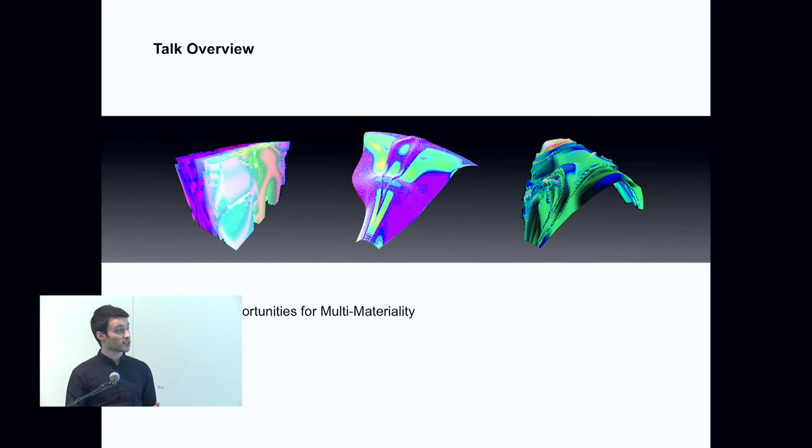So I'm going to talk about some of our work with volumetric modeling. We have some new ways of manipulating material and geometry within voxel-based systems. First of all, I want to highlight 3 of the big opportunities that we see for multi-materiality in general. I'm then going to talk about this big challenge that we see in computation, which is about the representation, the boundary representation with the voxels. Then I'm going to present our approach, where we're using evolvable volumetric gradient patterns. So this is really moving from raster-based graphics to vector-based graphics. And finally, I'm going to demo some of the work that we've been doing.

Okay, so firstly, one of the big opportunities we think is high performance. Nature just builds these incredible material structures. It somehow manages to take weak materials and combine them in ways that make them strong, and this is done by manipulating the microstructures. So maybe we can start to do this. Maybe we can take weak recyclable materials that we have lots of, and combine them in ways that make them strong, high-performance structures. You can imagine next-generation form finding, earthquake-resistant buildings in the future, light skyscrapers, perhaps.

But there are other opportunities as well, and this is about combining different materials together to create active behaviors. I'm sure you've seen things like Skylar Tibbits' 4D printing, self-assembling materials, and morphable structures as well. There's lots of work in aerospace about structures which can bend, exotic compliant mechanisms, and perhaps even in the future, integrating living materials.

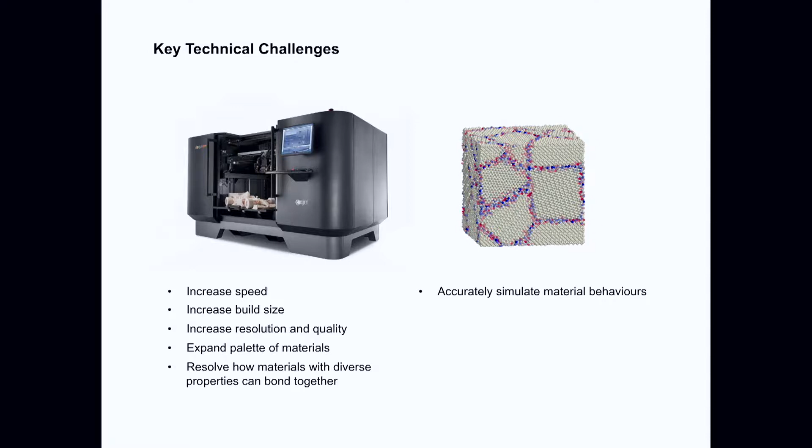In terms of the simulation side, we have big issues in how we accurately simulate these materials and these behaviors, especially when it's multiple materials together. And again, we need to be able to do this in times that are not excessively long.

But we also think there's major design problems. If these are the sort of technical problems which there's engineers working on, there are serious design problems, and these are our problems. These are the ones we've actually got to address. And so the first one is about moving from sort of boundary representations to voxel-based models. And it's really about material integration,

as discussed before. But we think there's a second problem, and this is perhaps less discussed and maybe less understood, but it becomes increasingly important as we start to move towards multi-materiality. And that's this idea of scalability. How do we actually start to control some of these structures? They're really, really complex objects.

So, for example, imagine we'd start to look at these sort of Heinz Isler type structures, these shell structures, and we wanted to be able to create the next generation of these with multi-material properties. Perhaps we could consider how we could change the geometry, but also change the material all the way through. The problem here is that these structures just have so much information, and they have so many degrees of freedom, and they have so many different possible combinations.

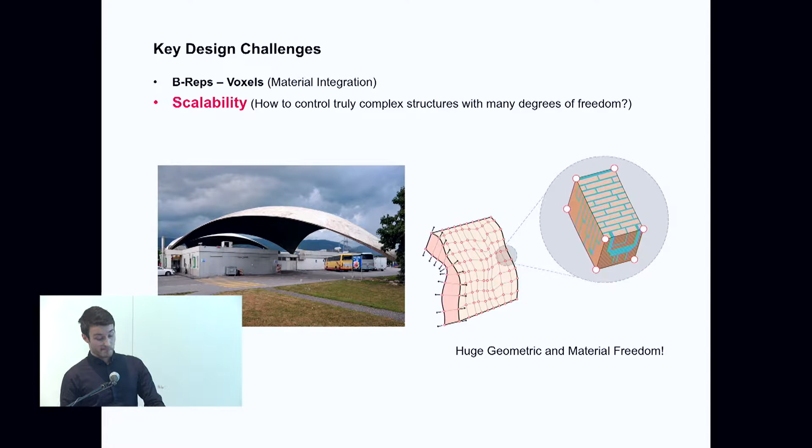Okay, so one of the big problems that we see is how do we actually start to discover good combinations of materials in this space? But before that, it's really, how do we actually even encode this type of structure?

Okay, so the most obvious way we could do this is we could look at direct encoding. So here we would have a sort of variable parameter which would stick onto every one of these voxels or pixels, and that sort of works quite well if you have a small amount of voxels, or if you're working on a reasonably simple or well-understood design problem like topology optimization, where we have good mathematical treatments.

However, if you want to do something more elaborate, like some of the stuff that Kostas was talking about at the start, or perhaps even like that shell structure, having these really high-performance structures, then we need different ways, different algorithms for searching the space. Now, evolutionary algorithms are quite good at this, and they're a good option. However, you start to incur this type of problem.

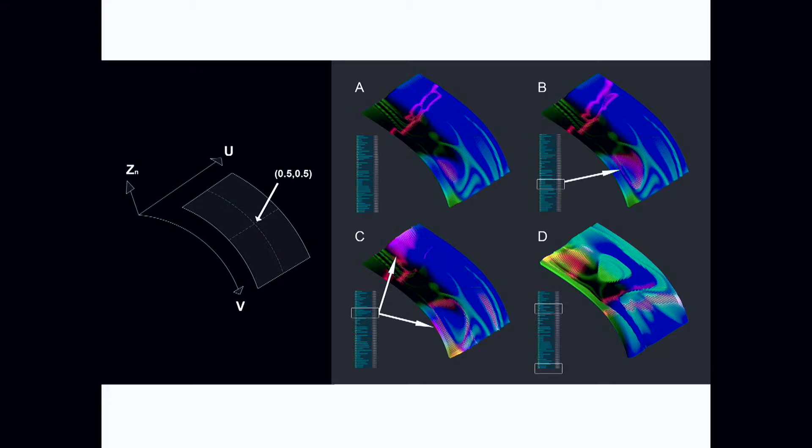And so moving on to the work that we've been doing at the moment. So what we can do is we can actually replace the X and the Y coordinate system and use NURBS space geometry. So we can take a surface in Rhino, bring it in and key on the UV coordinate system, and we can create patterns along surfaces. So this is quite nice, and as you can see on the side, some parameters make big changes, and some parameter changes make very small changes. And this makes them good for evolution, which we can actually optimize these quite well. And we've shown this through a few other studies. So it's a bit like playing with a sort of automatically generated Grasshopper definition, I guess.

Okay, but we can also use these to manipulate the surface, not just add color. We can take all of the points and we can query them and we can extrude them along their normal, for example. And then because we have this evolutionary algorithm which underpins it all, we can start to evolve surfaces that have good structure. So we can use sort of simple FEA software, and we can assign boundary conditions, assign loads, and we can optimize for specific mechanical properties of these surfaces. And obviously we can fabricate these quite easily.

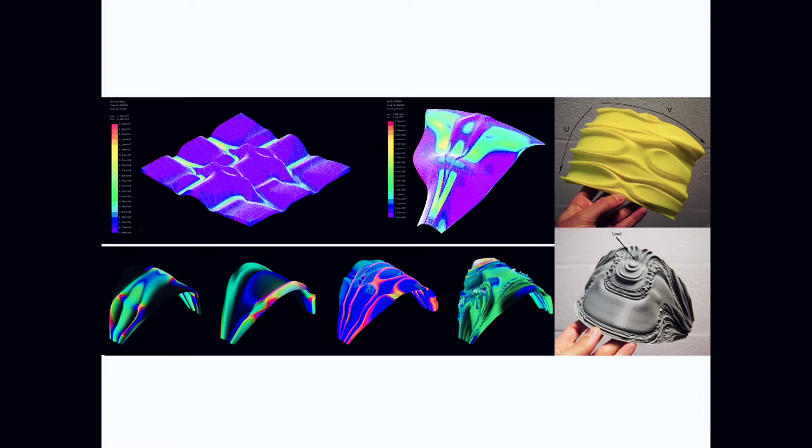Okay, so now it starts to get really exciting when we start to introduce multimateriality, because these things also work in 3D. So for example, if we use the U and the V coordinates of these NURBS surfaces, but we also have a sort of a Z coordinate which is relative to the normal of the surface, if that makes sense, then we can start to create shell structures which have a thickness, and we can manipulate all of the sort of voxels within that volume.

So what you can see here is simple XYZ geometries where we've used our CPPNs to create sort of random patterns to show really. And so as this CPPN shows, we have an output which says, are we going to place a voxel there or not? And if we are going to place a voxel, what's the material property of that going to be? And so this work is sort of still in process, but we're hoping to be able to create some nice multi-material structures in the near future and be able to optimize these for certain mechanical properties.

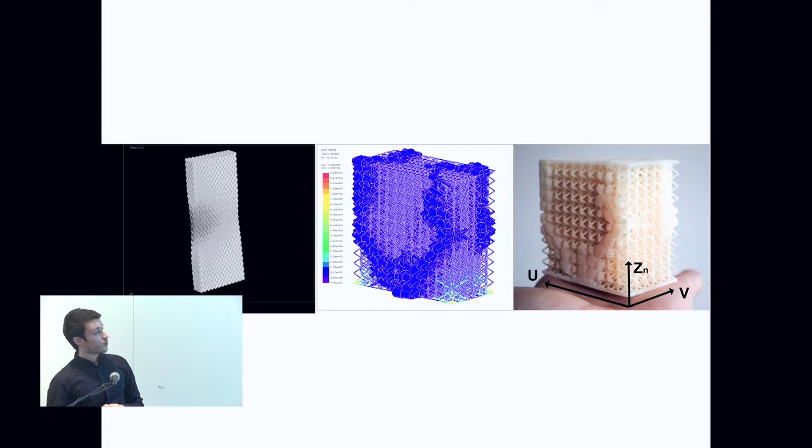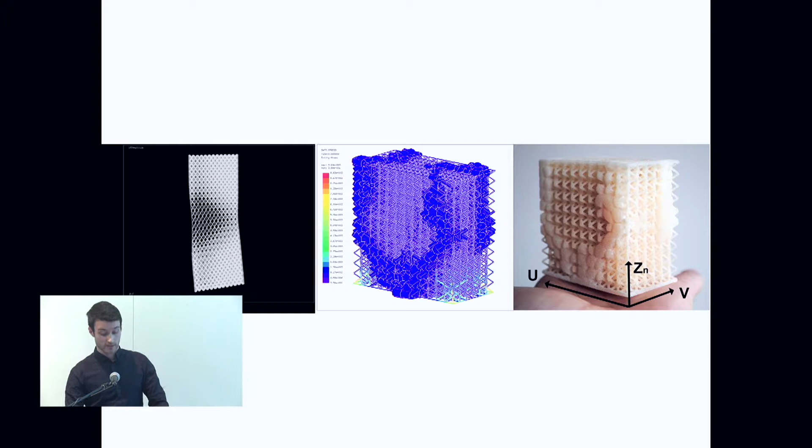And so as you can see by this dynamic image, this GIF, we don't necessarily have to optimize just for static behavior anymore. We could actually start to create compliant mechanisms, morphable structures, and there's lots of exciting opportunities when it gets to this stage. Again, this work's still in progress, and so we'll be working on this.

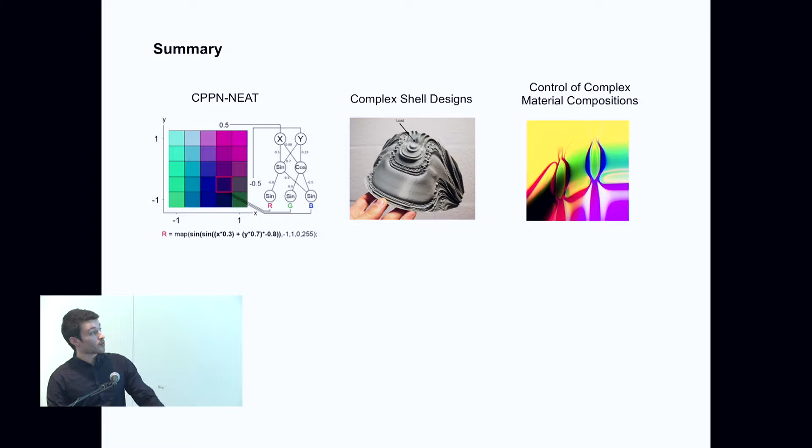So, in summary, we've created this nice, scalable encoding for multi-material design. Or we haven't created it, we've been developing it. The actual algorithm was developed by Ken Stanley. We've been able to present some nice complex shell designs, and there's lots of opportunities here. And we can control material compositions in ways that we couldn't beforehand. But there's some nice properties to this.

First of all, we have this very powerful algorithm under the hood, which is NEAT, so we can optimize these. Evolutionary algorithms are really well suited for distributed computation, so we can actually throw these things up onto the cloud potentially, and we can evolve really complex things. And this is where I think it starts to become exciting as well, that we can start to fabricate structures which are too complex to actually simulate on the computer.

So as Francis talked about before, there's this important process where we take our three-dimensional models and we slice them up. So if you see this two-dimensional image on the far right, we can actually create our slices from the CPPN information. So we can query each slice, which means that we can massively extend this to the biggest resolution that we can actually handle. And we can create all of those slices, and the final object could be much more complex than we could actually simulate on the computer. So this is interesting as well.

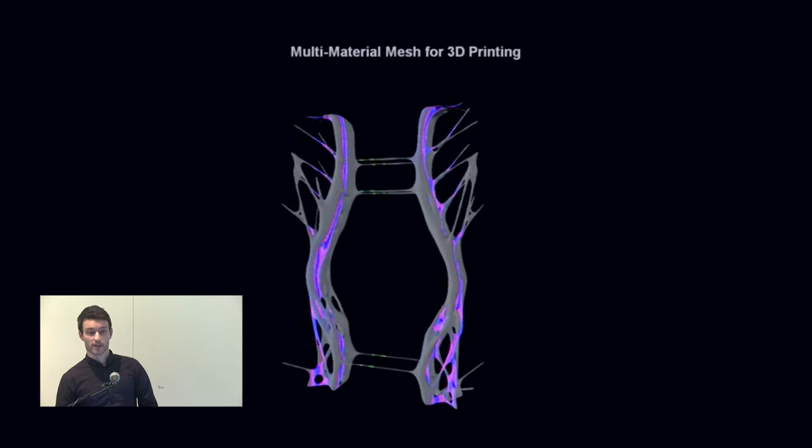And so finally, the thing to point out is that we're not limited to NURBS space geometry. We can do this in three-dimensional space. So we can start to play with these things more speculatively in three-dimensional space. There's lots of opportunities for generative design. Again, we maintain all of these properties that I've talked about, scalability, the regularities, and the infinite resolution. And we can start to play with these things with physics systems and all sorts of things.

So I guess the takeaway point is that once we start to move towards multi-material design, we start to create objects which are truly complex. And therefore, we need representations which can handle this. And CPPNs are a good option here. And so the tools and techniques that we've presented seem to be one good route towards being able to create multi-material design as we move forward. And that is the end.

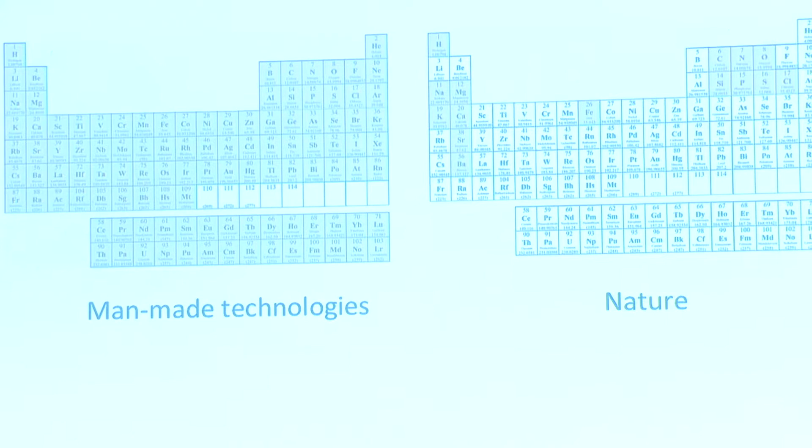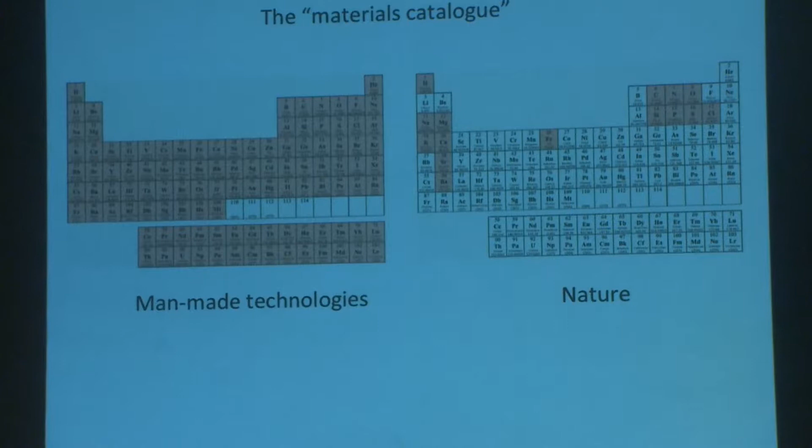So I'm going to start with a slide that addresses the very interesting point made this morning about the idea of having a catalog of materials from which architects could draw properties and information in order to fill in an algorithm or a software that would help them design materials. The reason why I start with this is to make the point that actually, if you do that, and if you think about all possible sources of materials available that are processed through man-made technologies, you can basically have the whole periodic table, which is very good, of course.

But it's also interesting to see how this is done in nature by living organisms. And if you look at the materials in terms of chemical elements that they use, this is a lot more restricted in terms of chemistry. And why is that interesting? That's really interesting when you think about energy efficiency, sustainability, biocompatibility, and so on. Why?

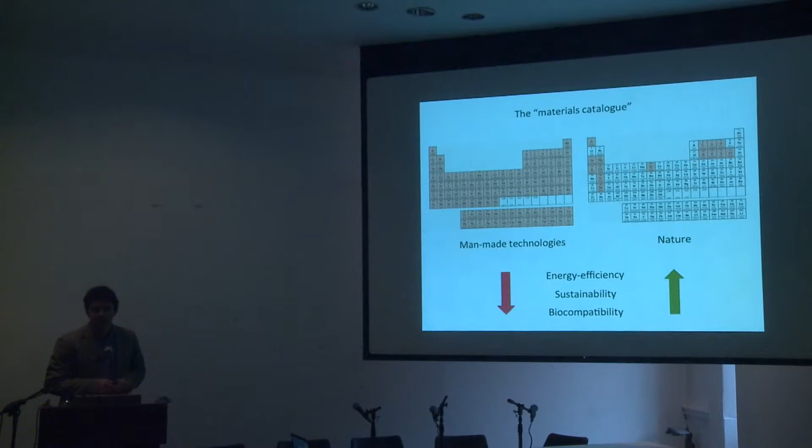Because nature had to live with this very narrow selection of chemicals in order to be energetically efficient, sustainable, biocompatible, and so on. So how does nature do that? It actually does that by taking this narrow selection of chemical building blocks and then arranging them in a very special way, as we heard already in the previous talk. And this leads to really interesting structures.

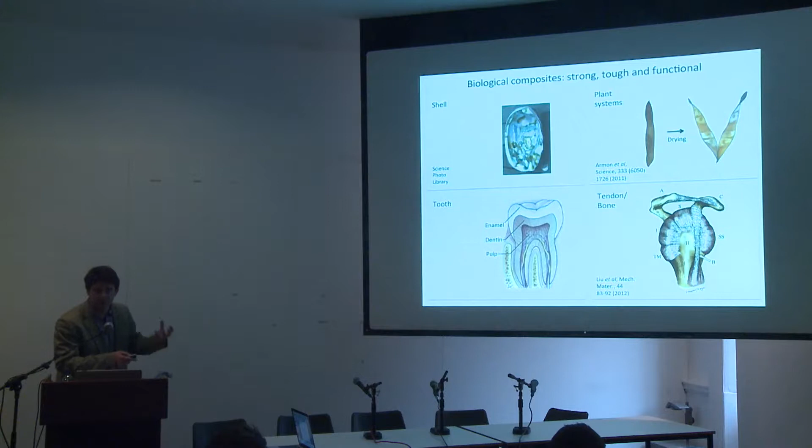We already heard about the seashells, the inner part of which is nacre. We also have amazing examples of microstructured composites like the tooth, the tendon to bone connection, which would be a region of very high stress concentrations, and yet it's very resistant to fatigue.

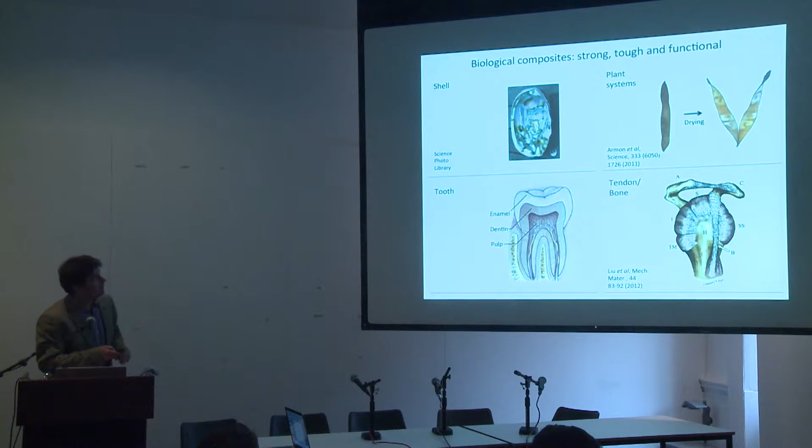But it's not only about mechanical properties, but there are also very interesting kinds of shape changes that are possible by microstructuring these materials. And here it's important to note that this shape change happens in the absence of any cellular control. So this is dead material, yet it's able to change in this dynamic fashion. So what's really unique about these materials is that they really have amazing microstructures, and that's what enables them to make something weak into something very strong or functional.

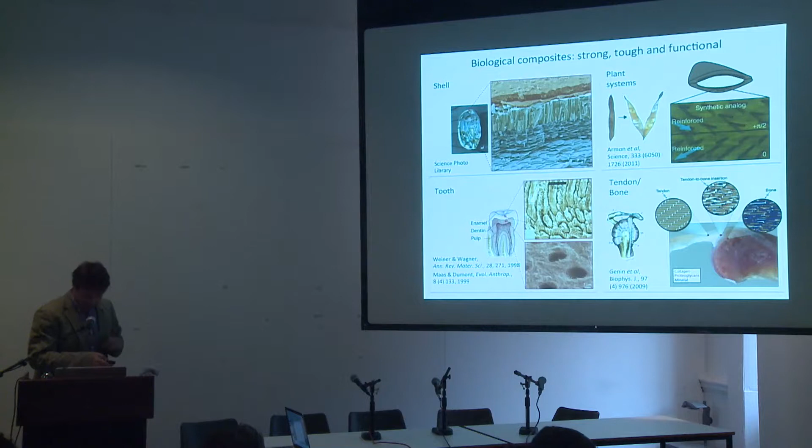So actually, if you look at the seed pod, in each one of these halves of the seed pod, you see a bilayer with cellulose fibrils oriented in a very particular way to generate this shape change. And here's another example where you have a combination of a gradient and orientational control as you go from the soft tendon to hard bone.

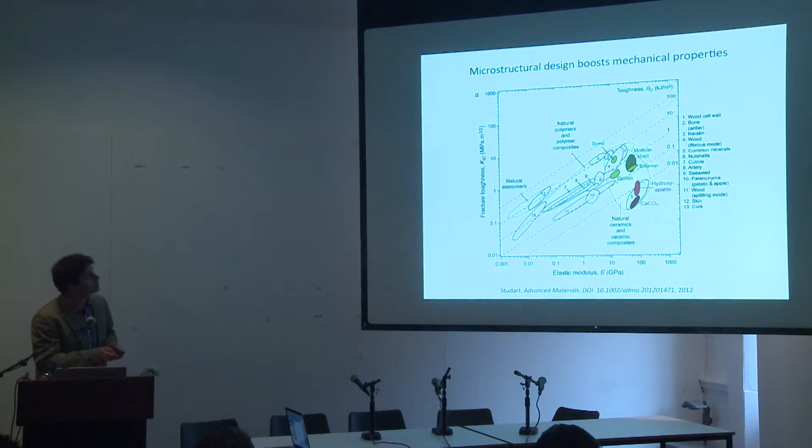Okay, so one other important aspect is that it's not always that we want to mimic one-to-one what's available in nature. First, because we can, in some applications, actually benefit from the wider range of chemicals that we have in man-made technologies. On the other hand, the boundary conditions in nature might be very different from engineering. So what we would really like to copy from nature is not the structure itself, but the design concept or the physical or mechanical principles behind these structures.

However, it's important also to remember that all these beautiful microstructures are all made via cell-mediated processes. So you need living organisms to make all this. So the big question in our field is how can one actually make this synthetically? So how can one make this using not the slow processes that nature uses, nor the complicated cell machinery, but in a more engineering approach.

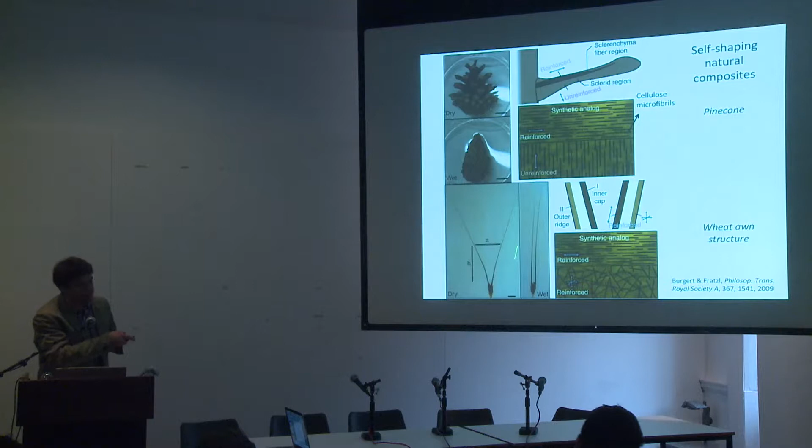The exact same idea, though in a slightly different configuration, is seen in these little hairs of the wheat awn structure. And here we have, again, this bilayer on one of these valves. Again here we have the fibers orthogonal to one another, but this time you have them tilted by 45 degrees with respect to the long axis of the system. And therefore you don't have pure bending, but you rather confuse the system and lead to this twisting as the minimum energy configuration.

So what I'm going to show you today is basically how we can, in an engineering approach, try to replicate this design concept. So I divided the talk in 2 parts. First, I'll tell you about a technology we've developed to align anisotropic particles in a fluid and then afterwards consolidate this fluid so that we keep this alignment. And second, how we can use this to achieve these self-shaping properties.

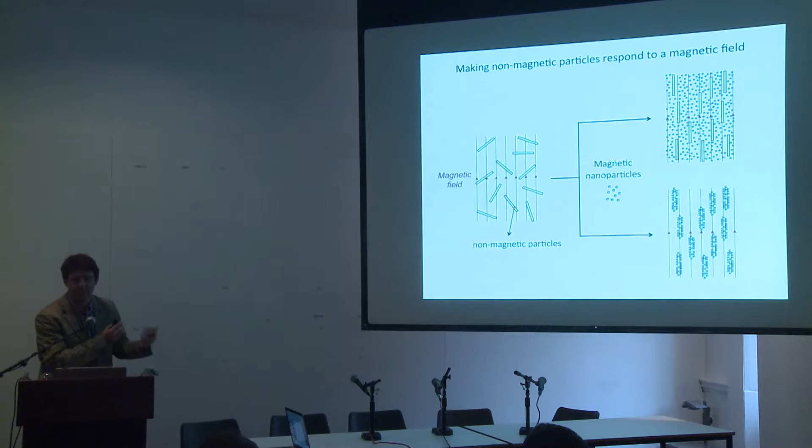One problem is that it's not always that you will have reinforcing particles which are magnetic. The metallic washers are magnetic themselves. So in that case, you have to come up with a trick to make non-magnetic fibers or platelets responsive to a magnetic field. There are two means to do this. One is by adding magnetic nanoparticles into the fluid. So imagine now these particles are suspended in the fluid, and now you add to this continuous phase the magnetic particles, or you adsorb these magnetic particles on the surface of your fibers. And in both cases, what you're doing is creating a mismatch in magnetic properties between the dispersed phase and the continuous phase.

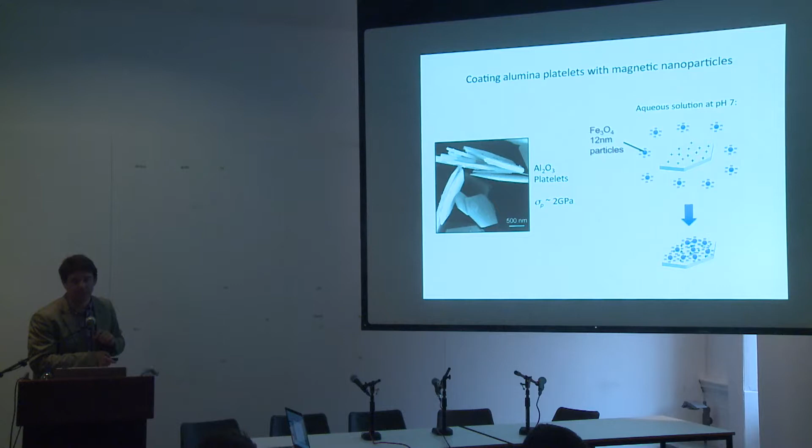So this is how we do it in practice. This is one of the types of reinforcements we use. These are ceramic, very stiff platelets of aluminum oxide, about 10 micrometers in the long axis and 300 nanometers in thickness. And now we coat them with iron oxide nanoparticles, so basically rust nanoparticles. So now I'm going to do the same experiment I did at the macroscopic level, but now under a microscope, looking at each one of these tiny microplatelets with the iron oxide coating.

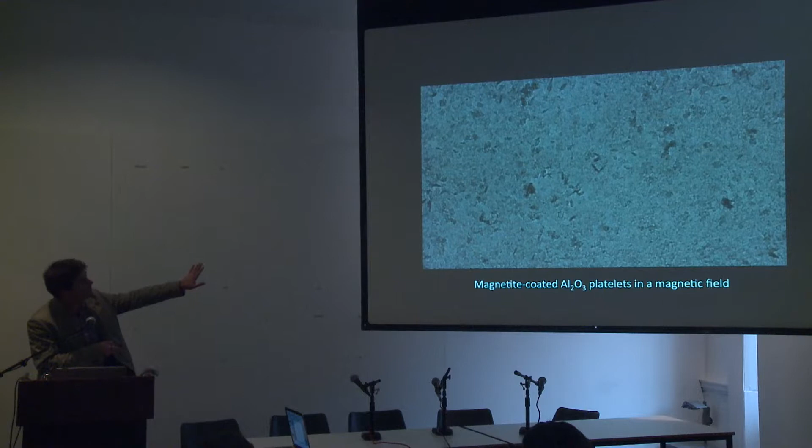So first, they're relatively heavy. They're 10 microns, and aluminum oxide is quite dense. So they all sit in a horizontal fashion on the glass slide, but now I'm going to apply a magnetic field out of the screen again. And you'll see that as soon as the field is on, they jump out of the glass slide, very nicely responsive. And if we turn off the field, you'll see that they all get back because of gravity. So this works very nicely.

But what was really a surprise to us was how low were the magnetic fields needed for such an effect. So we typically use tens of millitesla. So just to give you a feeling for it, this is the kind of magnetic field you get from the magnetic stripe of your credit card. Very, very low fields. And we went on to study this, and we realized that we're actually in a sweet spot in terms of particle size.

So now we have the ability to align particles in a fluid. All we have to do to get a composite is to transform this fluid. So imagine now a polymer melt or a monomer that you polymerize, to transform this fluid in a solid. So here's an example of one of our first approaches to do that. If we turn the magnetic field on out of the plane and then we consolidate the fluid, you see that we can nicely have the orientation that we got through the magnetic field. So in this case, an out-of-plane orientation as opposed to a horizontal orientation if the field is off.

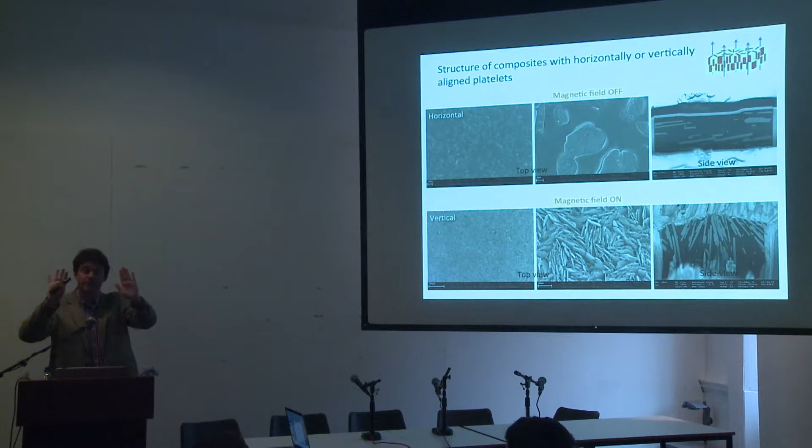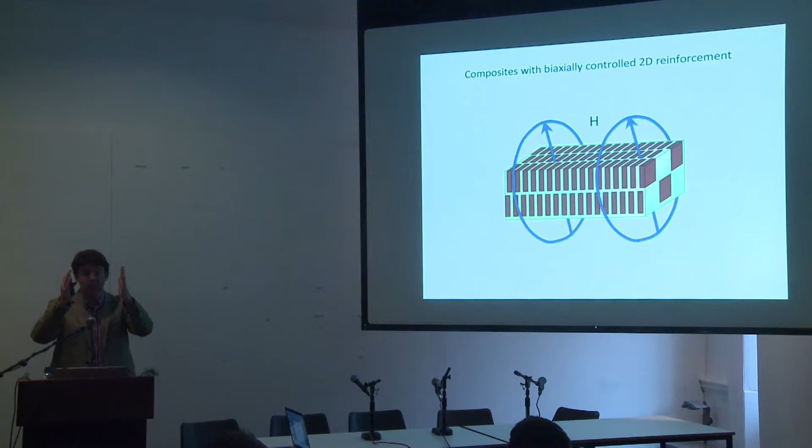So one problem if you work with platelets is that you see them all sticking out, but if you use a static magnetic field like this, you don't get control over the second axis of orientation, and that limits the maximum concentration of platelets you can get. So to solve this problem, you can actually rotate the magnetic fields to force them to align into the plane of the rotating field. And here are some of the ways. These are all proof of concept experiments at very small scales, but in principle, there's nothing that hinders this from being applied in bigger structures. So we can do this on a little larger samples to measure the mechanical properties. We can do this under a microscope to study this alignment effect.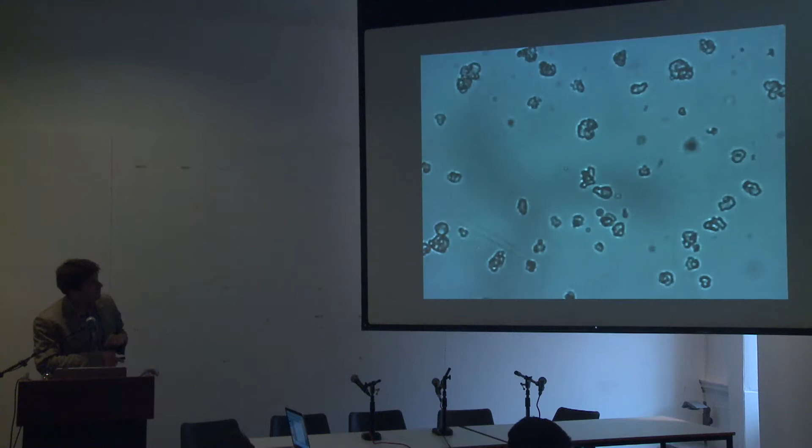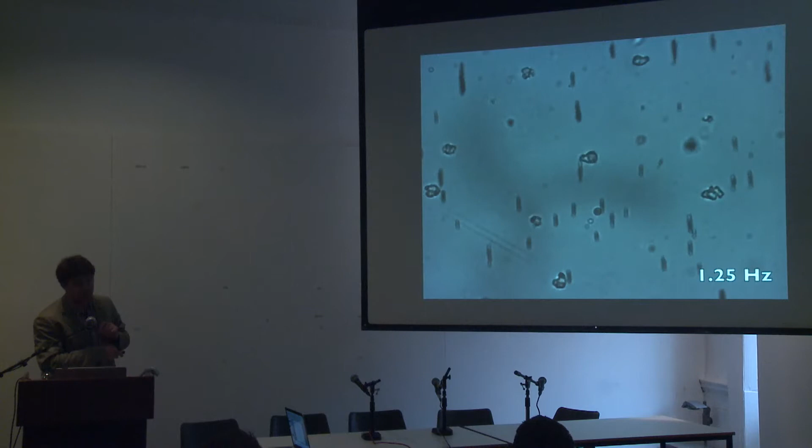Here's an example, again, of the little microplatelets, and now I'll apply a magnetic field in this direction, and you'll see that some of them align right away, and some start rolling, and then I'll start increasing the speed of this rotating magnetic field, and you'll see that at a critical frequency, critical speed, all of them will align in this biaxial fashion, which allows us to really control in 2 dimensions the orientation of these platelets.

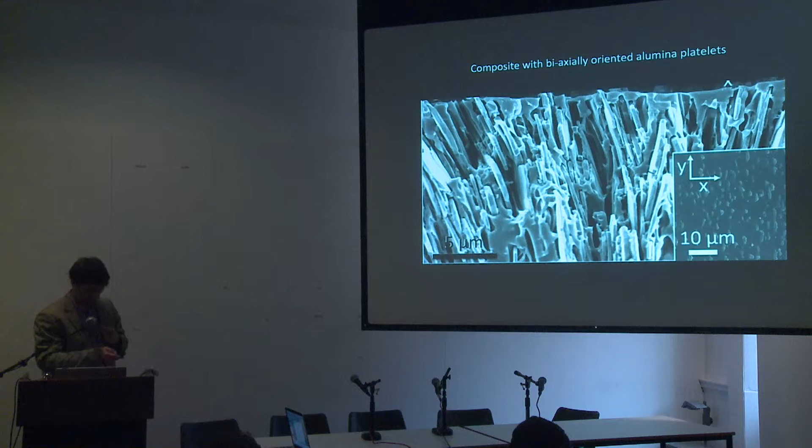So you can model all these and come up with an expression that tells you what is this velocity of the rotating field in order to achieve this alignment. So I won't go into the details here, but that's a very important quantification needed for the actual realization of the alignment. And here's an example of an unusual orientation, which is an out-of-plane orientation that you would not get by, for example, just applying shear to the system, that we are able to achieve using this technology. And you can imagine many other possibilities using the rotating field, static field, field gradients, combinations of responsive with non-responsive platelets, and so on. And here are some real microstructures that we've been able to realize using this approach.

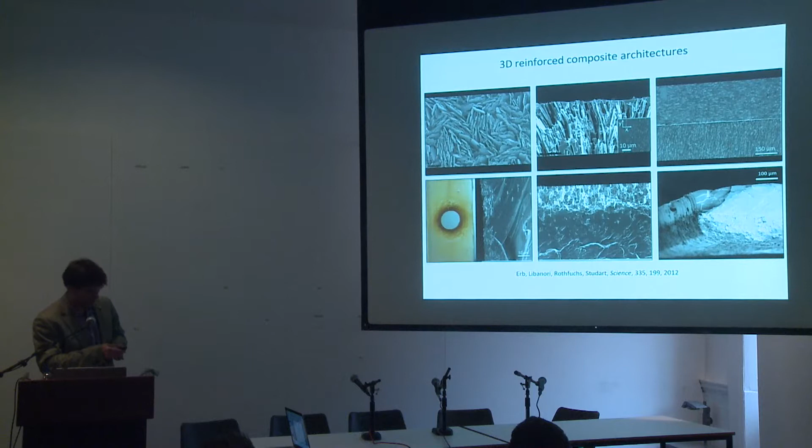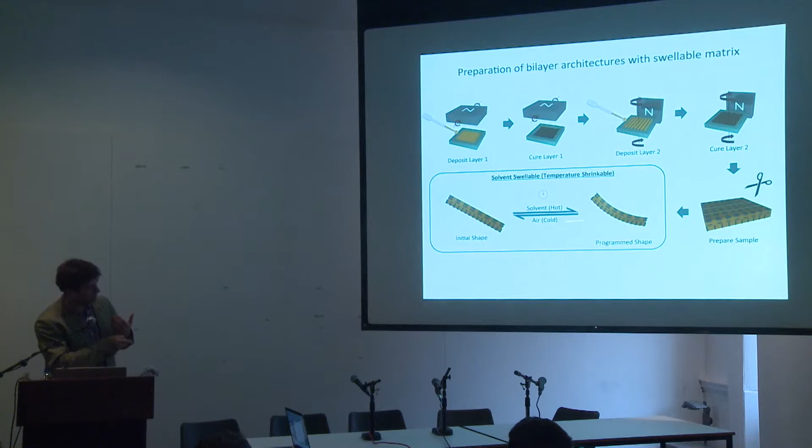So now the question is, can we exploit it to make self-shaping composites? So here, I've told you already that the design concept behind this self-shaping effect is to align platelets or fibers in a given direction. And since we know how to do that, all we have to do here is basically to use this approach in bilayers. So here would be a first layer of your material, here would be a second layer, and in each one of the layers you have an orthogonal orientation of these platelets. And now if we just cut it and have a polymer matrix which is responsive to an external stimulus, we should be able to see these effects. And indeed, that's what we see if we take a bilayer and we cut it at what we call a zero cutting angle, because it forms a 0-degree angle with the bottom layer.

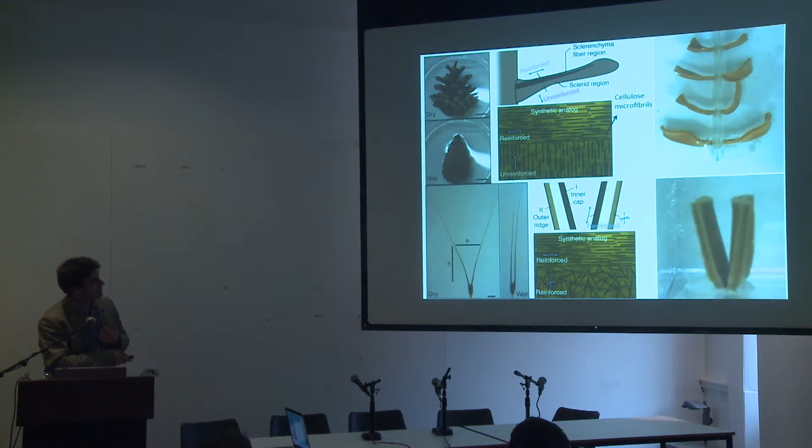If you do that and put it in water, you see that it nicely replicates this bending effect. However, this is rather easy to do with metallic bilayers. What is more interesting is actually this twisting effect. And here, for us, it would be very easy to achieve because you can take the same bilayer but now cut at a 45-degree angle in order to reproduce this design. And if you do that and put them in water, you see that they nicely reproduce the shape change that we program through the fiber architecture.

And you can then go all the way from pure bending to pure twisting with mixes of the two, and change the chirality depending on the relative angle of the two, and that provides a wider design space for these self-shaping structures.

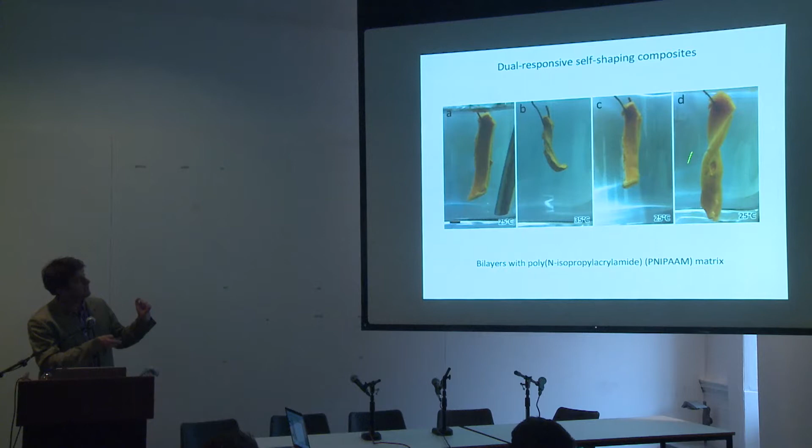The other interesting thing is that we can pick polymer matrices which are responsive to more than one stimulus. For example, this one would be responsive to water uptake and temperature, so that if you first increase the temperature, it twists in one direction, and then if you cool it down again and let it swell, it would twist in the other direction. And you can repeat this as much as 20 times, and it will always do it reproducibly.

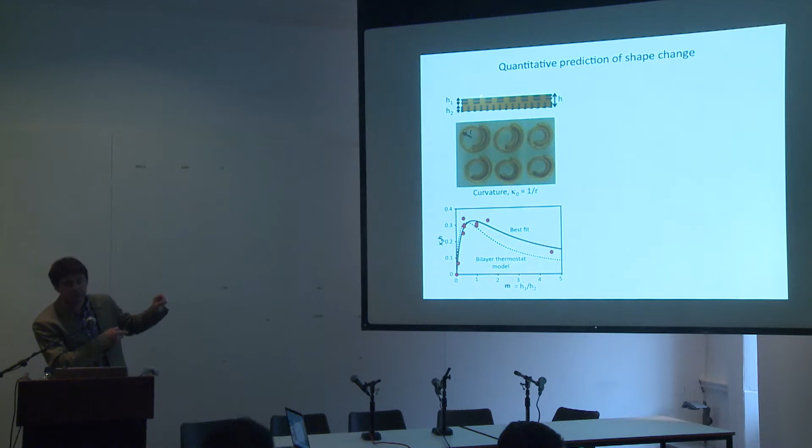Of course, now if we talk about programming the shape change, you also have to connect initial parameters of your structure, like the relative thickness of these layers, or the cutting angle, with the final structure or geometry that you get. In the case of bending structures, this would be the radius of curvature. In the case of mixed shape change, you would have the radius and the pitch. And I won't go into details, but we are able to nicely predict these final geometrical parameters based on initial properties of your composite.

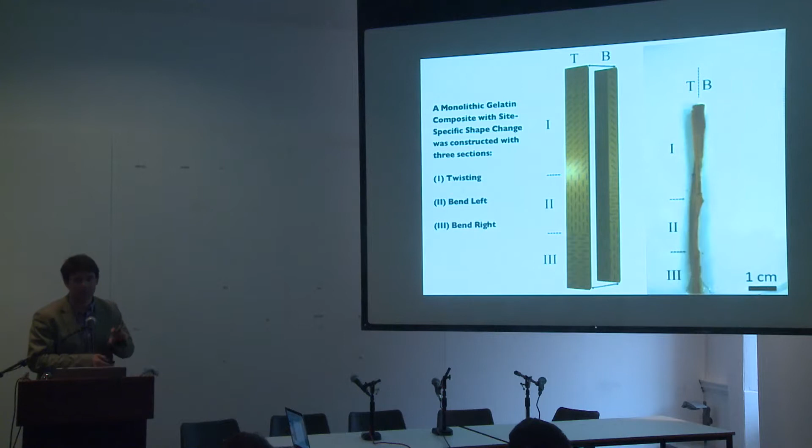The other possibility here is that you can program different regions of the material to undergo different shape change. So here we program this part to twist, this to bend to the left, this to bend to the right. And if you eventually put them in water, you see that they will react as we've programmed.

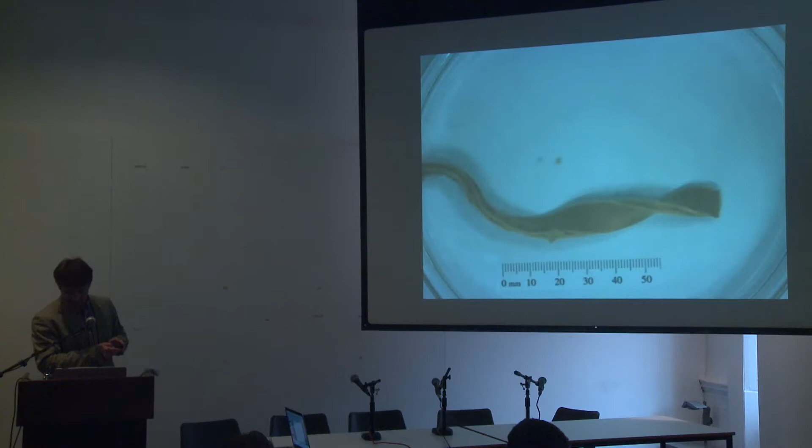So this brings me to the summary. I told you about technology that we've developed where we use magnetic fields in order to control the orientation of reinforcing particles, first in a fluid. And we had this surprising observation that it's extremely easy to align these particles as long as you choose particles with the right size. And then I told you about how one can exploit this to make a wide range of different microstructures that are not possible with today's long fiber composite technologies.

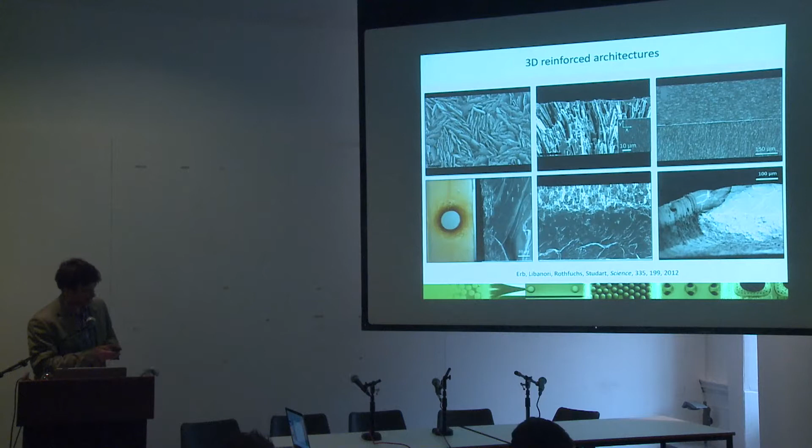And then I gave this example where we've used this ability to align platelets in order to achieve such a self-shaping effect, which can be bending, pure twisting, and combinations of the two. And what's really important here is that, of course, you do have synthetic materials that are also shape-changing, like metallic alloys and other polymers. But again, these are specific to a narrow selection of materials.

If you think of metallic alloys, you have, for example, nickel titanium, which has one specific phase transformation at the atomic level that allows for this shape memory effect. And with polymers, the same thing. You always need polymers with a specific glass transition temperature. And here, you're not limited at all. You can use any type of fiber, which is sustainable, energy efficient, bioresorbable, and so on, and any type of matrix as long as it's responsive to an external stimulus.

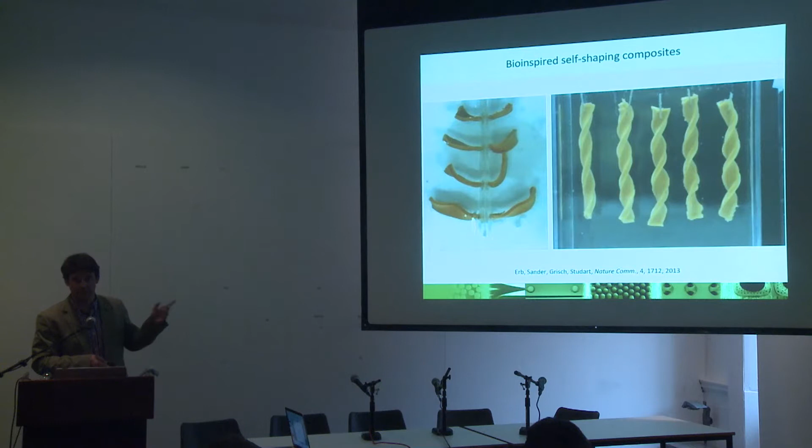So that brings me back to the very first slide, where another possibility in terms of materials design is not only to pick one from the existing catalog, but take those which are interesting from other aspects and microstructure them to get interesting functionalities like this self-shaping one.

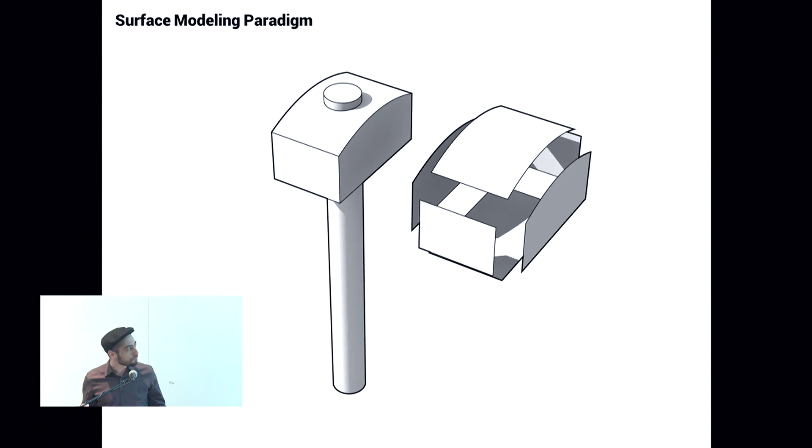Now, you heard again and again today the criticism towards the boundary representation paradigm. All the software tools we have at the moment for design are using more or less the same kind of underlying representation. If I were to ask my students to design a hammer, I would get something like that. Maybe it would look much better, but the conceptualization of the hammer would be that what is important about it is the actual exterior frame, the shape of the hammerhead.

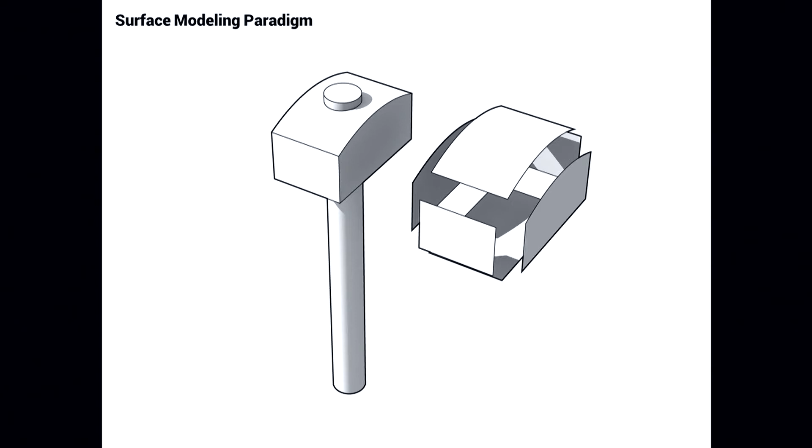But in reality, if a blacksmith creates a hammer, what is important is the distribution of soft and hard iron within the hammerhead that absorbs vibrations so that you don't injure your hand when you use it. So the boundary representation basically assumes that there is a boundary that separates an interior from an exterior. And what happens within the boundary is not part of the thought process, part of the design process. It's very difficult to define and work with.

It also affects the way we think about architecture because it very strongly suggests that architecture is about the design of envelopes or skins that, again, separate an interior from an exterior. I mean, there are ways to go around it, and conceptually, architects have been very innovative and creative in that sense. But in general, the tools we are using do strongly suggest this distinction.

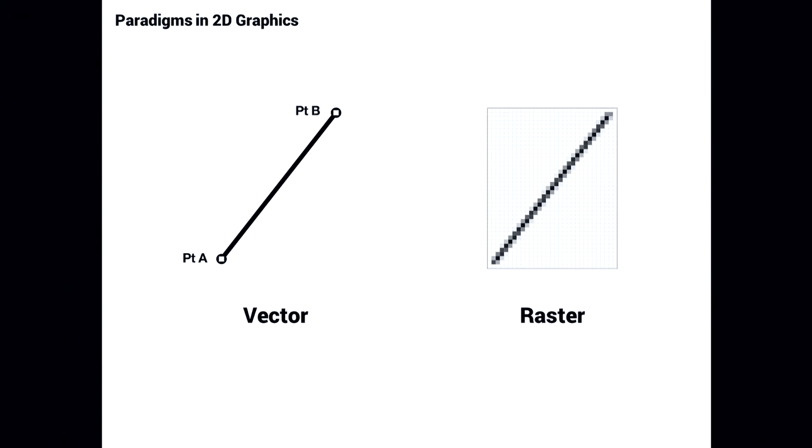At the same time, the software tools that we are using are based on a vector representation when we are talking about CAD and design software, or a raster representation when we talk about image editing software. But if we wanted to create these continuous material distributions, we need a new paradigm. And what we are suggesting is a hybrid between traditional CAD modeling and workflows from image analysis and the biomedical field. Part of my interest comes from my exposure to topology optimization.

When I was working in an engineering firm, we did a lot of research and developed interfaces that implement these sorts of methods. And in the opening chapter of Bendsøe's book on topology optimization, he describes the problem of structure as one of a continuous material distribution, which again is a different paradigm in terms of how we think about structures, even if the forms are familiar.

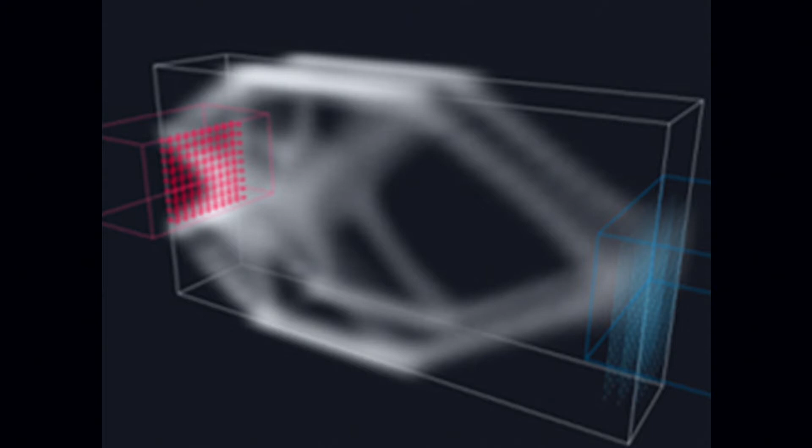For this kind of cantilever, you can find the optimal form in many different ways, and actually we know the optimal conditions and shape even without topology optimization. But the way we reach that conclusion using these methods suggests a different way of thinking about structure and materiality. So it's basically a more fuzzy object.

So, obviously, we're going to talk a little bit about voxels as extensions of 2D pixels. These are very straightforward, you know all these things. Our software is based on a multi-channel voxel image that has two channels, one for designating shape, the distinction between void and solid, but in a continuous field, so you can select different isosurfaces, and at the same time, by using a gradient, you maintain some information about normals that allows a smooth reconstruction of the underlying shapes.

And the secondary channel, which is the material mixing. And this comes from the fact that when we started the research, we were working with Objet, now Stratasys, and their multi-material 3D printer Connex. So the way this achieves the continuum distribution of material is basically a mixing of two materials at variable ratios. So this secondary channel describes the mixing ratio between two materials.

So if the material A is transparent and the material B is opaque, you have an opacity gradient. If one is rubber and the other is plastic, you have a stiffness gradient, and so on. So by combining these two channels, we have objects that define both the shape and the interior distribution of material.

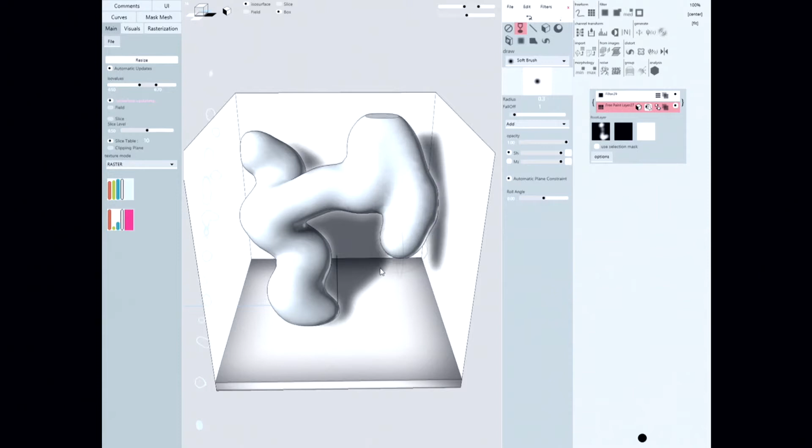So first of all, these are uses of the UI for Monolith. So it's a user interface that allows you to define this kind of volumetric model. So you're working on a voxelized space. You can work with workflows that are familiar from using any kind of image editing software, but you can also apply filters on models like Gaussian blurs and so on that are workflows, again, that come from image editing.

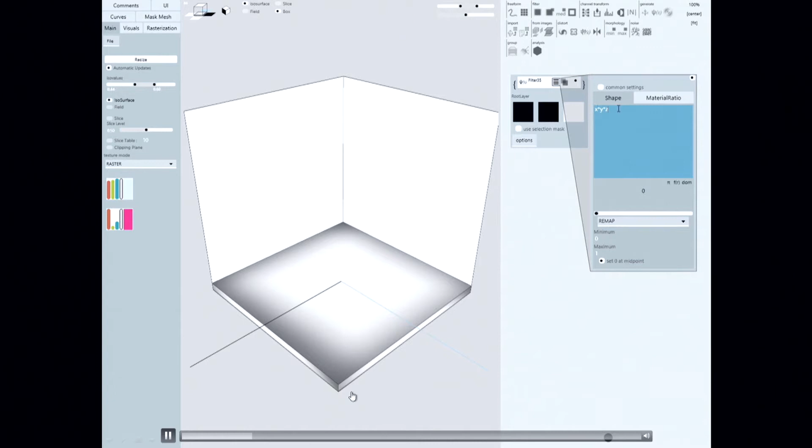You can define formulas, parametric formulas that define the shape and superimpose them. Monolith is based on an idea of a parameterized stack of superimposed voxel images. So here creating one formula generated pattern, and then the gradient, the material mixing field, is another formula generated pattern.

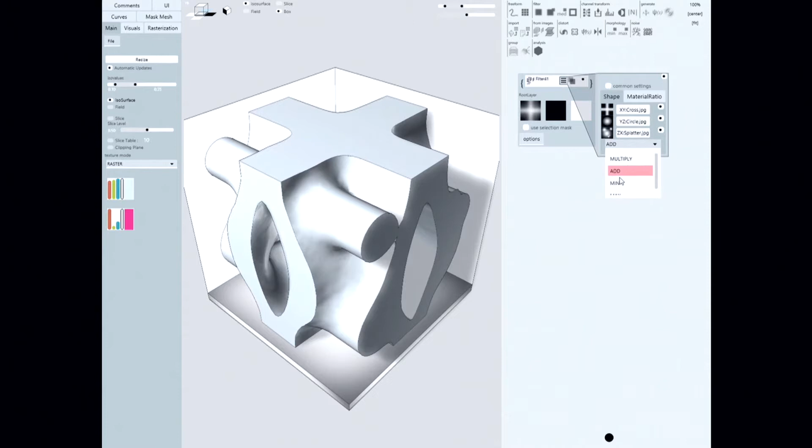Again, operations like sweeping and lofting and all this becomes fuzzy and continuous. So here is lofting between two images that you can draw in any software. And you can achieve types of joints and continuity that are very difficult to do with surface modeling. And that is because voxel-based modeling is more flexible in how it handles topology. So you can have continuous topological variations that are difficult in the BREP regime.

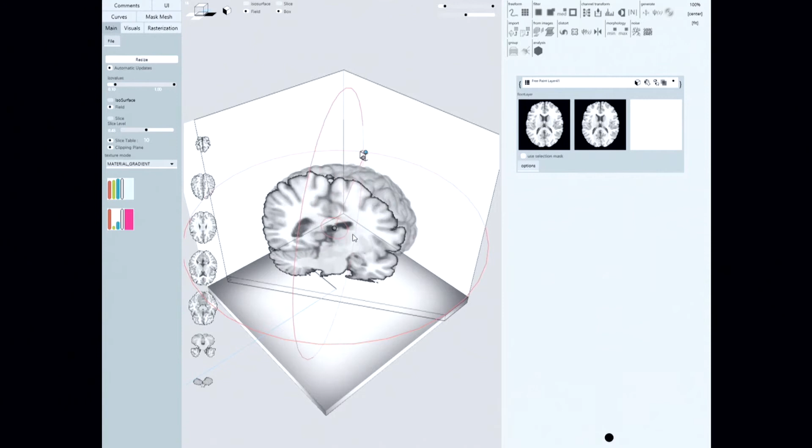You can work and manipulate complex data sets and apply, again, transformations on them. There are visualization tools that allow you to see the inner structure. These are taken from the medical field and so on. You can also bring in information like meshes and voxelize it, like you see the bunny here. The bunny is a reference mesh.

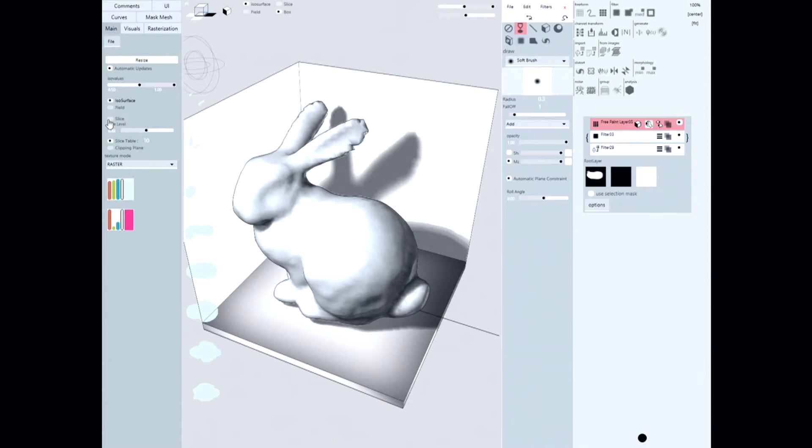The voxelization, again, has to use traditional typographic techniques that create a little bit of anti-aliasing along the boundary so that it maintains information about the gradient and the surface. So you don't get a pixelated bunny. But you can also work on its interior. You can also define that I want this opaque material here and this transparent material there. You can apply filters like Gaussian blurring and so on.

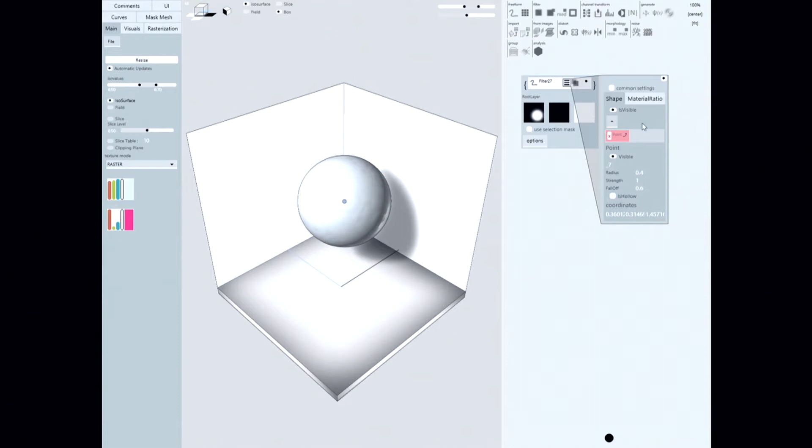Boolean operations become fuzzy again because these are continuous gradient fields. They are not necessarily a black and white condition. And so when you combine gradient operations, you have this typical mixing of additive, subtractive, and so on. But there is a little bit of fuzziness, so it's a natural filleting that comes with this process.

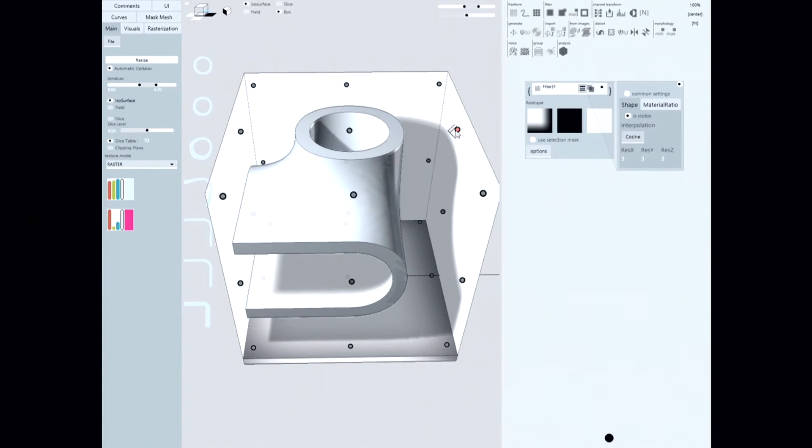And this is another workflow, which is the equivalent of editing the control points of a surface, a grid-based NURBS surface, but you can choose different interpolating schemes, and that changes the underlying shape. So by changing the weights of the control points to positive or negative and the interpolation scheme, you can very easily sculpt this sort of continuous objects.

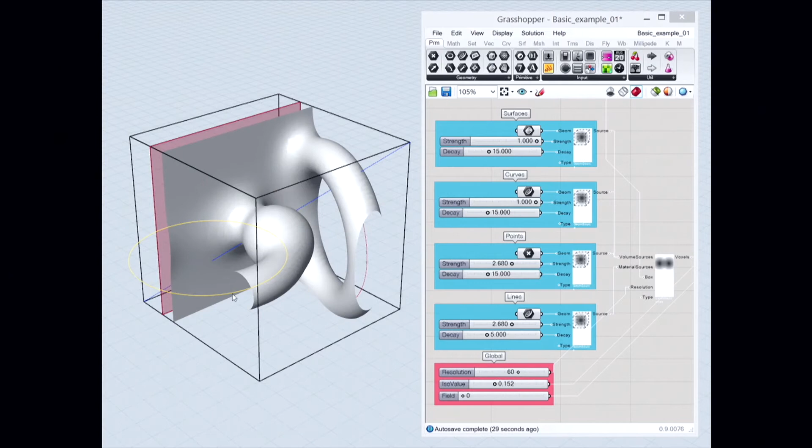We can also do workflows. So we're trying to position it as a hybrid. So we do allow workflows that encompass software that we are already using. So it can have a live connection with Rhino, for example. So you can have the skeleton defining geometry from Rhino or Grasshopper directly imported or emitted towards Monolith. It can even work in real time.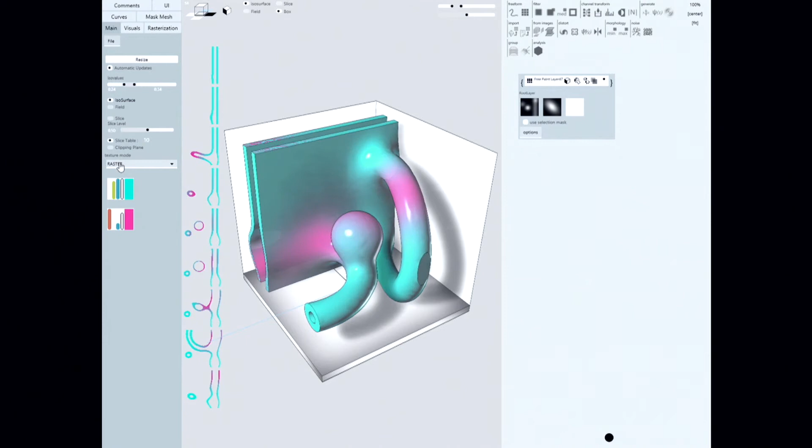And there is a back and forth of translation between skeleton geometry, FREP, boundary representation. So there are workflows that combine all the familiar ways of working. The other important thing when you're working with voxels, though, is that you can apply filtering operations. And filtering is a concept that comes from image analysis. And that's an interesting transition point.

The software we are using now, the BREP software, was not developed for architects. It was developed for mechanical engineers. And the way it uses the assembly paradigm and the modeling system, it presupposes or implies a mechanical engineer's mindset. The voxel-based software is developed and comes from the biomedical industry. And the mindset there is one of filtering, signal analysis.

So geometry is seen as a signal. It's not seen as discrete units, differential manifolds and so on, but it's seen as a signal that you can decompose and rearrange in many different ways. So as I said, you can do Gaussian blur, which means you transfer this object into its frequency space, cut off some frequencies, and bring it back into its configuration space.

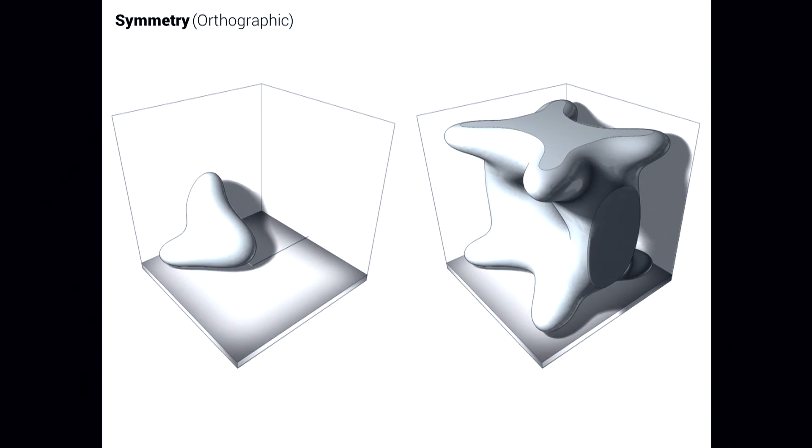You can apply the blurring at different channels. So for example, we can smooth the shape channel without smoothing the material density channel. We can have highly nonlinear filters that actually drastically change the topology. These are shape modifiers that you cannot apply easily on mesh-based or BREP-based geometry.

And different types of noise, and then all these techniques from medical images like dilation, erosion, and so on. But on top of that, we wanted to engage, because of the way multi-material 3D printers work, they actually don't directly chemically mix the materials. They're just creating dots, small micro patterns of different materials, and that is what we perceive macroscopically as an intermediate material. So they are basically inkjet printers.

And for that, we wanted to look into traditional typographic techniques, but extend them into 3 dimensions. So basically, there is a macroscopic field that is determining the overall shape. There is a microscopic field that has to do with the dots of ink or material and the intrinsic properties of this material. And there is a mesoscopic field that is up for grabs. It's a design problem there because it defines intermediate, elastic, and optical properties.

So we looked a lot at techniques of dithering, error diffusion, half-tone sets of tools. So we can define our own patterns even just in 2D. So this is just working in Photoshop, for example. You define some kind of skeletal pattern that you want to use as a 3-dimensional halftone. Then create some kind of shape that has some material gradation inside. This has a vertical gradient from material 1 to material 2. And bring this pattern as a micro pattern inside.

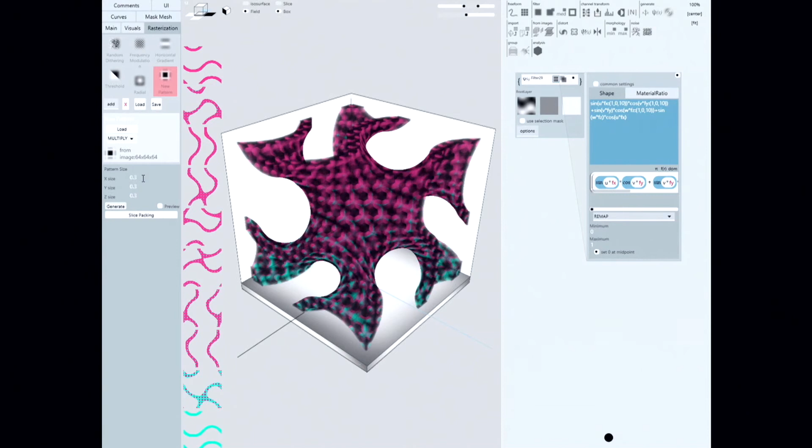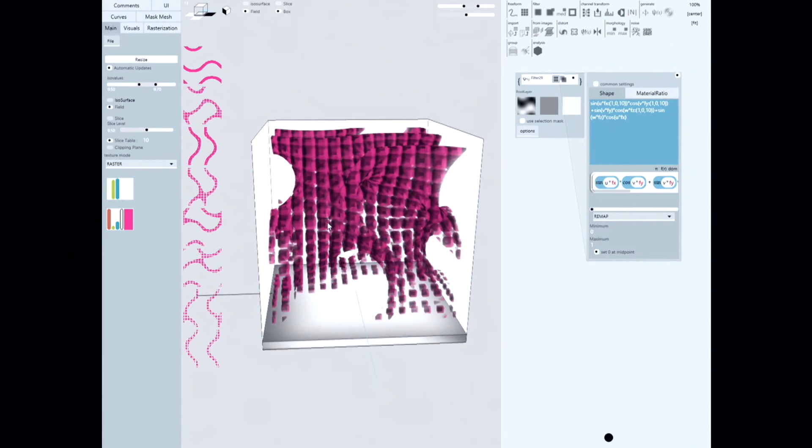Again, because we are using these visualization techniques that are based on GPU processing and come from medical imaging, we don't have to generate very heavy and difficult meshes. It's just visualized in real time on the GPU, using 3-dimensional textures and so on. So it becomes possible to define both the detail, the micro pattern, and the macroscopic shape almost in real time and at interactive rates. So you can intuitively start working with this sort of tools.

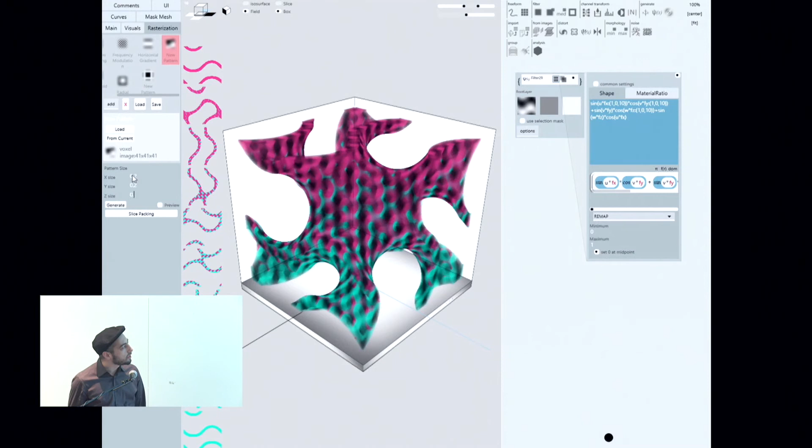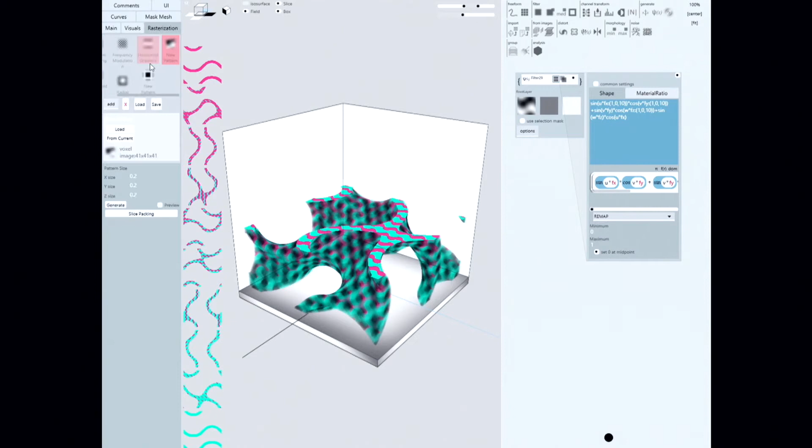So again, using these techniques, we had some workshops with students and combined it with other research areas to see what are the design opportunities in these systems. These are microscope images of some of the micro patterns. It's mostly dealing with optical, some with elastic properties. It's not only about material density, material 1 versus material 2 ratio, but also anisotropy of the material that we can micromanage. We can create things that look transparent from one view and become opaque from another, and we can manage the anisotropy of the optical properties throughout the material. We can create interesting transmission of light through the material bulk.

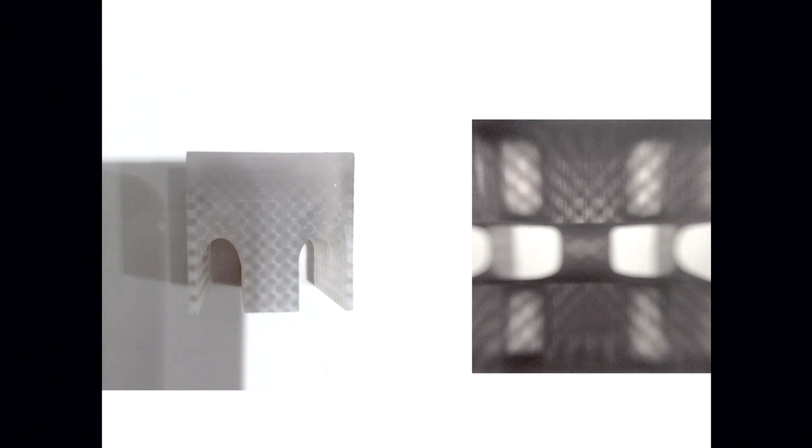And these are some designs of students that have hidden designs within them. You can have patterns that align from a particular view and they let a lot of light through, but from other views become almost opaque or at least fuzzy.

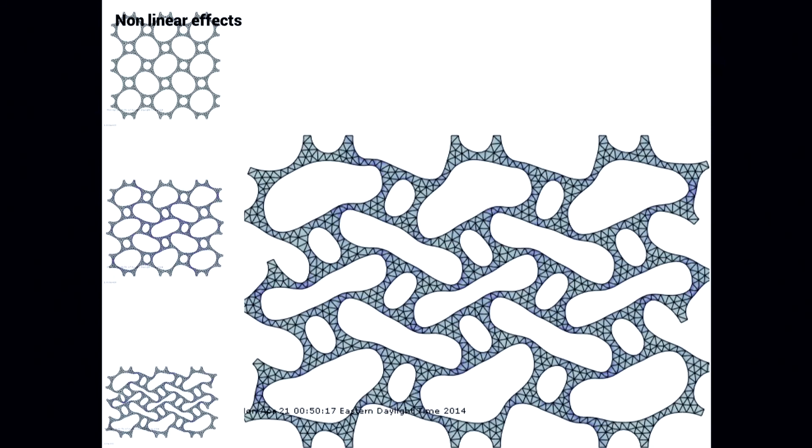And also we are interested in research when we have the ability to do elastic materials with nonlinear deformations. This is from research with Katia Bertoldi's group in Harvard School of Engineering. So I cannot show the actual applications here because it's not published yet, but anyway. We can kind of combine soft and hard materials and create interesting secondary actuation.

Again, by manipulating the anisotropy of the mixing of the soft and hard material, we can create surfaces or even volumes that bend in unexpected ways because the grain of the material is actually designed, so it's not the grain that we get from an industrial process right now, which is always homogeneous, or from a natural process that is uncontrollable, but something that is a designed grain.

The other power of voxel-based techniques is in analysis. Basically, voxel-based techniques are very appropriate for GPU processing, and a lot of near real-time analysis techniques are possible to implement. So because you already work on a discrete space, you don't have to have the complex discretization step that you always have when you try to analyze solid models.

But you can directly apply finite element techniques on the analysis model, and especially static analysis is almost instantaneous. There are new techniques like lattice-Boltzmann simulations for fluid dynamics and similar techniques for heat transfer. So we can, for once, create a model that uses multi-physics and has real-time feedback for the designer.

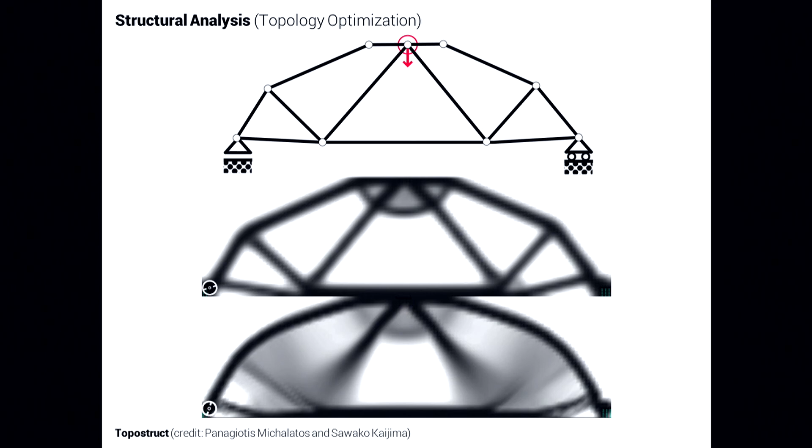And this form, we know it from traditional engineering. It's very well known. The whole optimal truss-like distributions are very well known. But the interesting thing is that the optimal form is not this one, but it's this one, the one that has the continuity inside. If you try to remove the continuity of the material distribution, then you end up with the suboptimal form, actually. So the true optimal, the true minimum in the minimum compliance problem is actually a continuum form. It's not a discrete form.

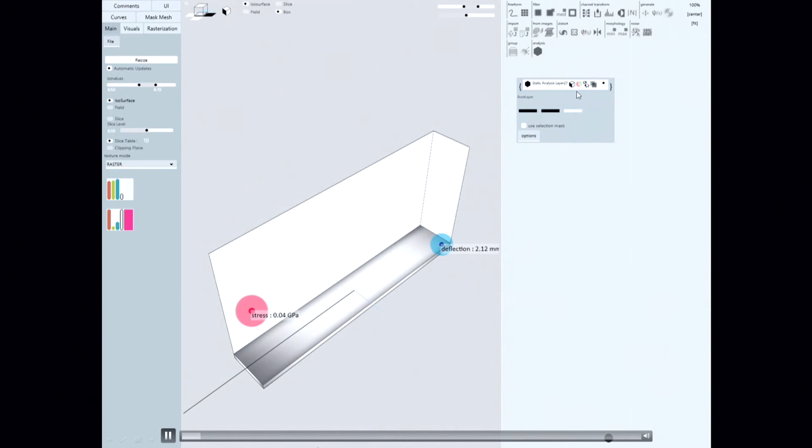But usually with topology optimization, you get something like that, right? You 3D print it, and this is the final outcome, and it's a direct interpretation. Now in Monolith, we integrated the structural analysis and topology optimization system. You can set up the modulus of elasticity of the two materials that you are mixing, and you can set the curve of the mixing of moduli in relation to mixing of materials.

Because something to keep in mind is that if you have material A and material B, and you mix them in a half and half ratio, you don't get half and half the modulus of elasticity. This is an active area of research, but actually we try to figure out what are the moduli of elasticity mixing curves, and as well for optics, the optical mixing curves for the materials.

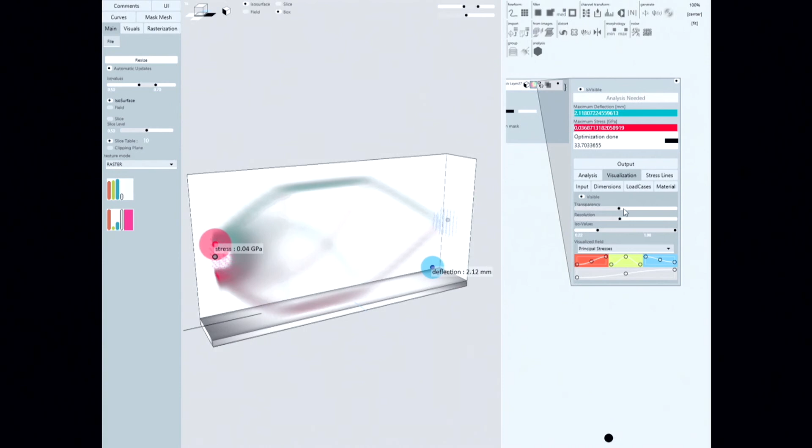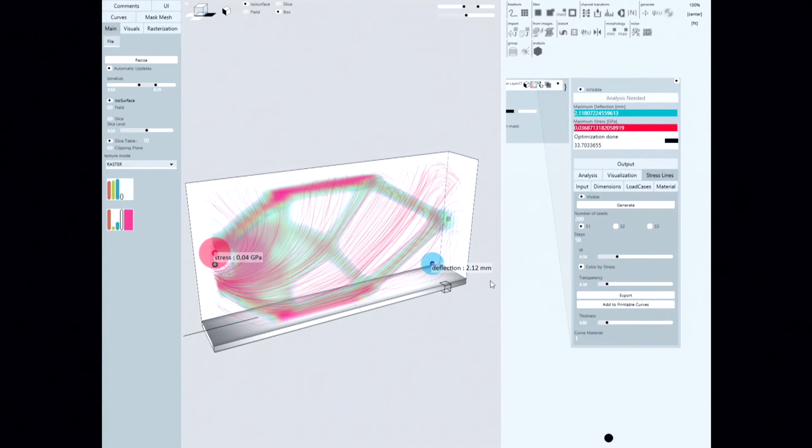So here you can see tension compression diagrams in a typical topologically optimal truss, deflections, stresses, stress lines. So in a sense, we can actually directly fabricate this object. And what is this object?

So it's not quite a truss, one category of traditional engineering, and it's not quite a reinforced beam. It's something between the two, and it's also a continuum. So it's more or less a new type of structure that we can start thinking about. Because it has a continuous variation between the hard and the soft material, you avoid certain effects of concentration of stresses on material boundaries because it becomes a little bit more diffused. So it has a few advantages, and it's something that we are looking into at the moment.

We can also, because we can control the printing in this very minute scale on the deposition of the different materials, create very fine line patterns without ever having to mesh anything, without having to create meshes with billions of triangles. We can directly print line patterns, and this is principal stress directions within a little slab volume.

And this is another model that has, again, the full three-dimensional principal stress curve distribution within the bulk of the transparent material, which is an interesting opportunity because it's not, again, only about the density of the material, but the directionality at which you place one material versus another is extremely important. If, for example, you think of this as a reinforcement problem, these are the curves that you probably want your reinforcement to follow or to align to.

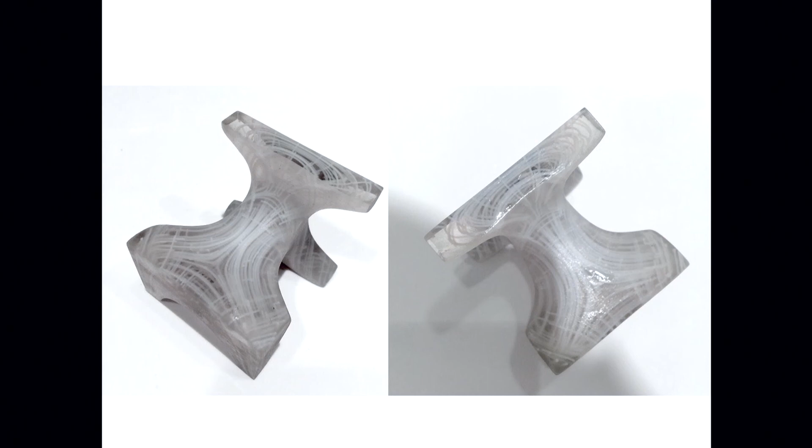But this hybrid approach to modeling that combines workflows from traditional CAD or assembly-based paradigms with workflows from medical imaging that are voxel-based and continuous, in a sense is pushing the scale space which is accessible during the design process. So we're pushing what we mean by detailed design further down the scale, to smaller and smaller scales. But also now the scale space is understood as a continuum.

So it's not about doing the planning and then the detailed design and choosing materials, but potentially we can have this continuum scale space that we traverse during the design process. And scale is not anymore about the size of the designed object, the artifact, but about the information density.

And I found the discussion about tectonics in the morning quite interesting, of what is the state of tectonics, but it seems that tectonics right now is this empty signifier. It's a signifier looking for a content, and this is a good indication that we are in a transitional period in terms of modes of production.